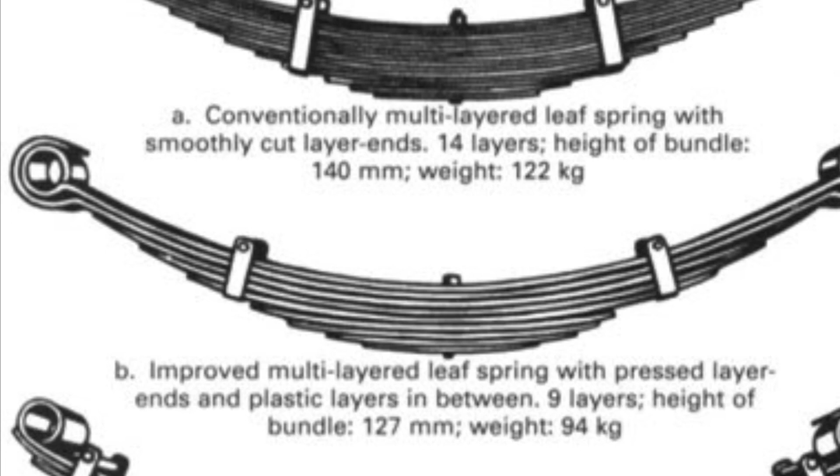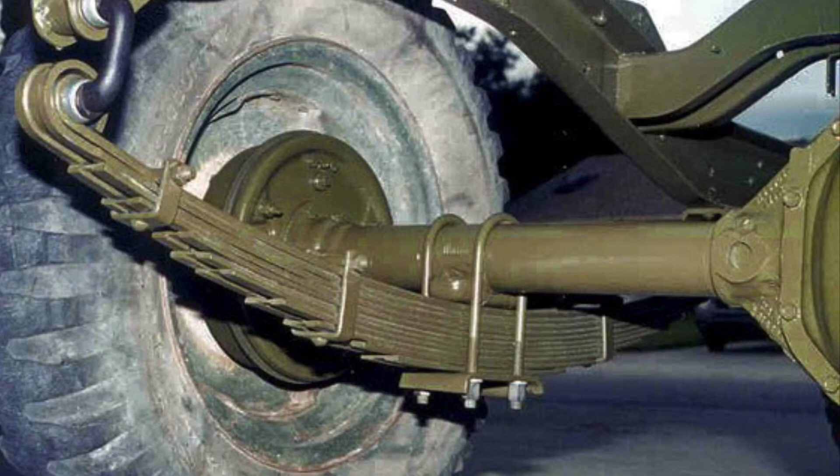The next form of individual suspension setup in the olden days was called a leaf spring. It looks like a bent, bowed bit of metal, quite thick wall metal, almost like a banana either this way or that way, made of a number of different bent bits of metal called leaves. The leaf spring has different sized bits of metal and allows for a little bit of compliancy and suspension.

But obviously that was very unsophisticated and very basic. Through the development of suspension, different manufacturers made different types, with different operating costs.

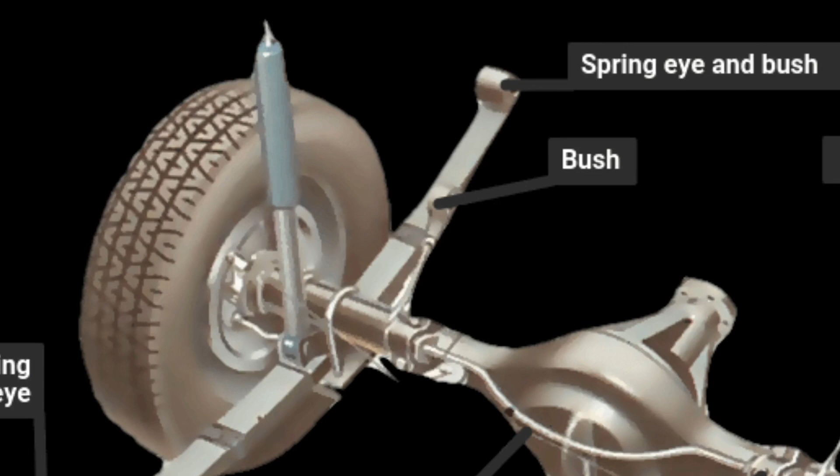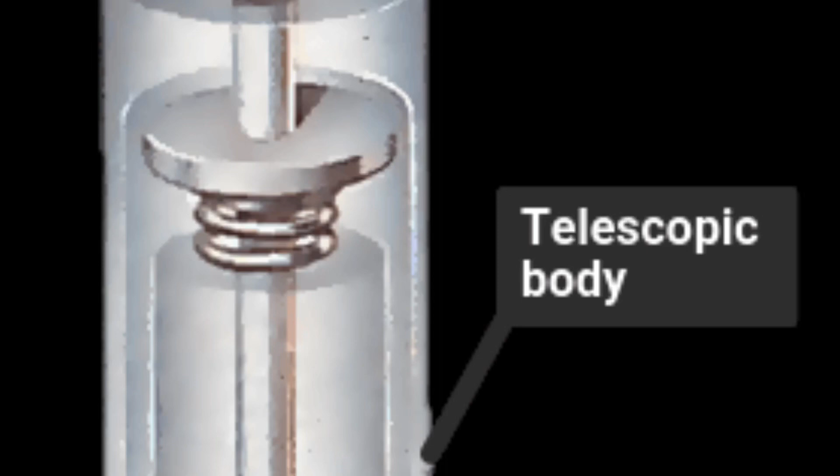The first kind of application was a dampener. The dampener allowed some travel and movement - it had a hydraulic reservoir inside with a piston, and as you pressed up and down, it would flex, move, and shock load depending on the frequency. There were porous holes inside the piston that allowed oil to go through and drain back through. But that was quite a basic suspension strut.

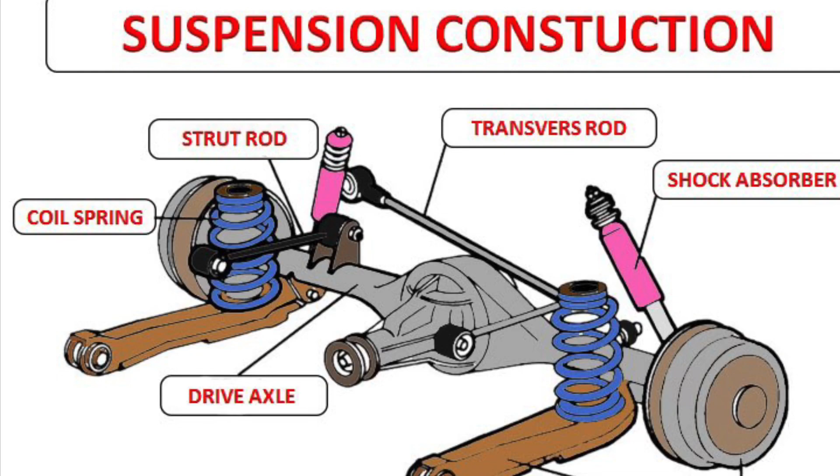Then there was a strut and a spring - they could both be used together. The spring allowed a bit more refinement, I guess is the word - a lot more flex, and that's basically what I've got over here.

Depending on how sporty a car would be, it would be dictated by how stiff a spring was used. If you've got a comfortable car, the spring rate and even the dampening rate is going to be quite soft, because a car needs to be comfortable. But on a sporty car, the suspension would typically want to be stiff.

There's a lot more science into that, because there's lots of other components that dictate how a car handles, like the anti-roll bar. In America they call it a sway bar, which is quite a good terminology - both terminologies for that piece of equipment are actually really true.

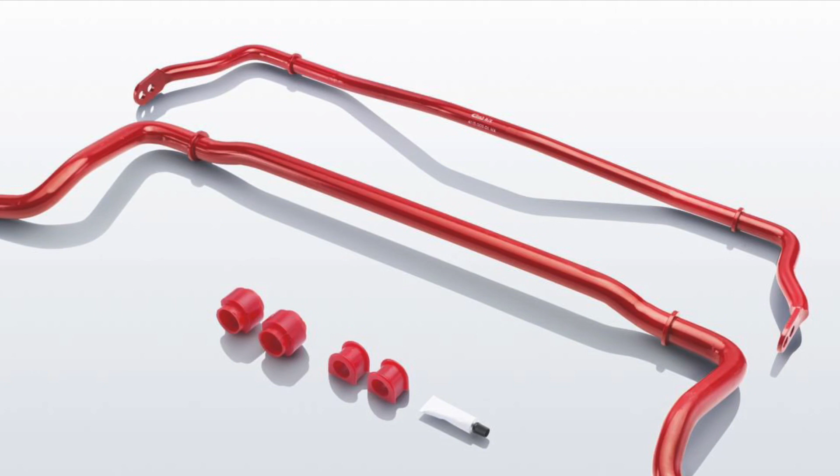Anti-roll - it's a bar that connects one part of the suspension on the left hand side to the right hand side, and vice versa. It's just one long bar that goes from one part of the suspension componentry to the other, and it acts as a brace bar from one point to the other, stiffening up the chassis to stop flex and sway from side to side. So it's an anti-roll bar or a sway bar as they call it in America, and I think Japan too, but we call it an anti-roll bar - they're both great terminologies.

Other than that, you've got wishbones added to some cars, and even double wishbones, independent suspension, independent rear suspension, MacPherson - so different forms of suspension that were a little bit more advanced than just a strut and a spring. Some suspension systems just use a spring, and some even use bump stops to avoid the spring or part of the chassis hitting and getting a shock load through the chassis. So you'd have a bump stop that would stop that happening.

And then, beyond that, I mentioned something called a MacPherson Strut. A MacPherson Strut essentially is a strut that runs through - I haven't got one, I'm gutted, I haven't got one at the moment.

Obviously we're in lockdown, so I have a strut in a barn somewhere else, but I'm going to use my arm to show it instead. A strut basically works together with the spring.

It's a coil over spring, which is the same as a MacPherson Strut. It was first patented by someone called MacPherson - I'm not going to go into any more of that. A MacPherson Strut is basically a strut with a coil over it, which is essentially a coilover. They were the first people to make and manufacture a coilover, so it was called a MacPherson Strut.

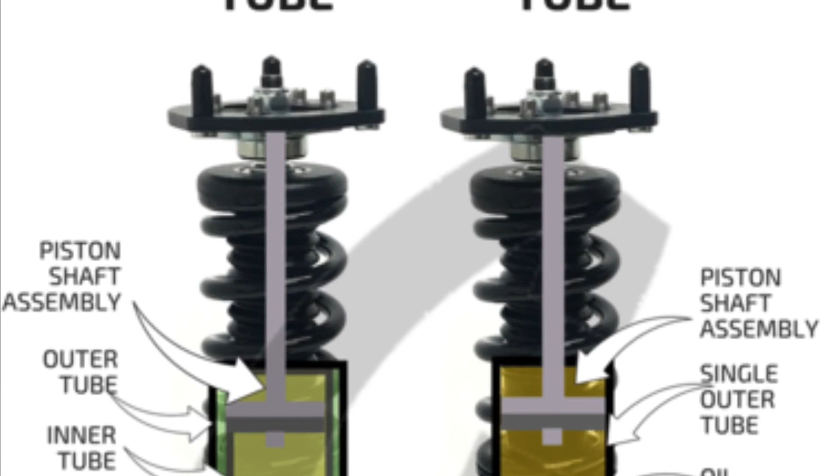Coilovers were the really sophisticated suspension system that kind of changed the world as such. But obviously you've got different things like your wishbone, drop links, ball joints, and steering knuckle - they're all attached to different components on the suspension, all parts of the suspension system.

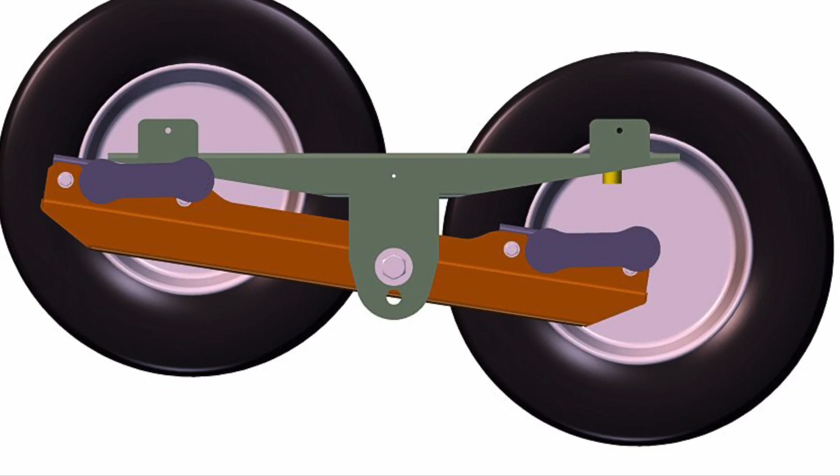On some older cars - and I can't think of any modern cars that still have it - there's old torsion beam suspension as well. They kind of have almost like a wishbone that rocks up and down as the wheel moves up and down, and the shock loading that normally happens on the strut and piston on the spring instead goes through a torsion beam. The vibrations and frequencies are transferred through it, which is almost like a single strut that runs from front to rear. It's a very unsophisticated bit of suspension, but works reasonably well and was used in cars quite frequently.

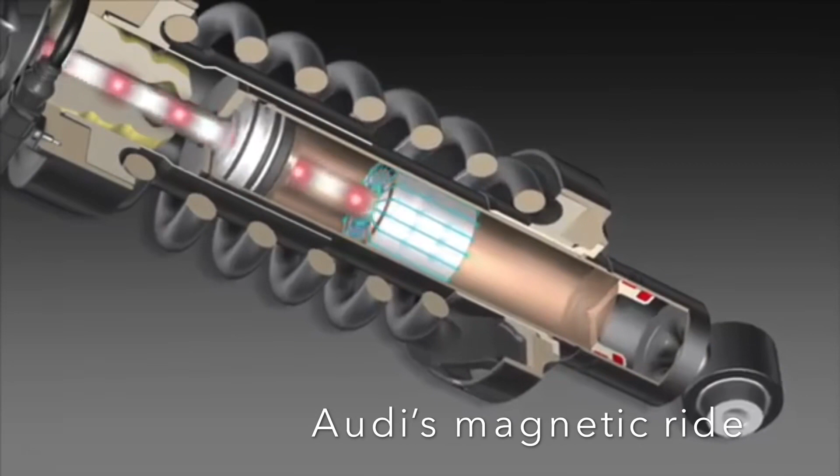Other than that, going back to a typical, decent coilover suspension, new advancements in suspension have also included active suspension - things like the magnetic ride you find in Audi and some Volkswagen Audi group cars.

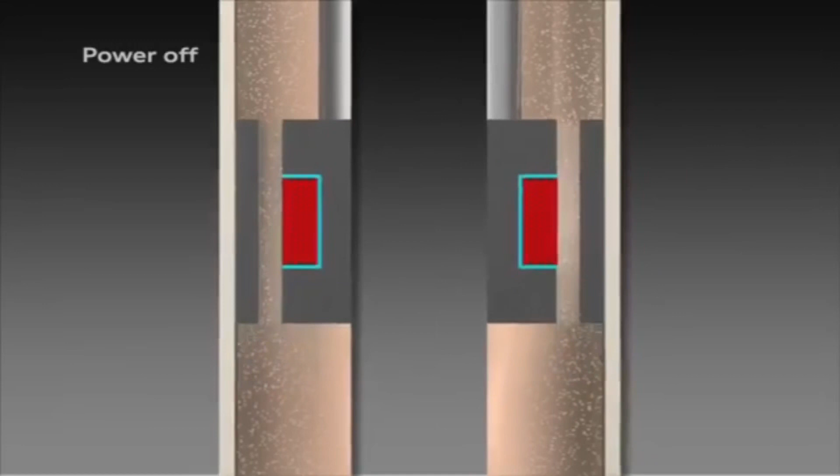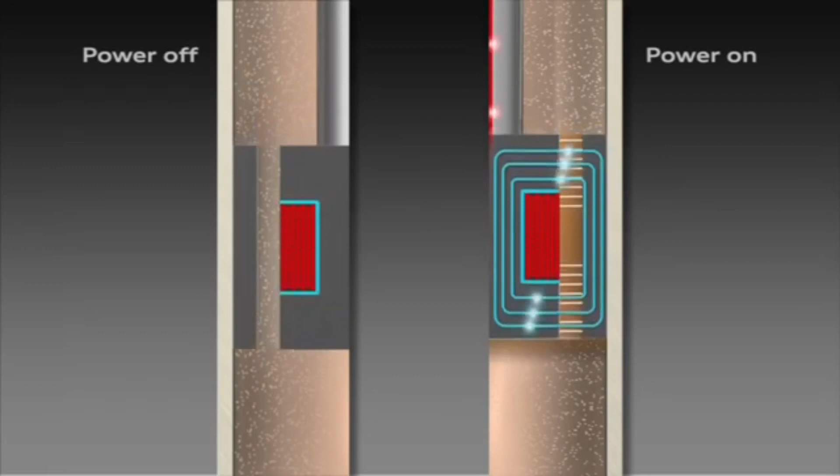It's still a coilover, but rather than just hydraulic fluid inside the strut, it has magnetically charged particles - iron ferrous particles inside the coil and inside the hydraulic fluid. A charge is put through the suspension, and that changes the properties within the oil, which then dictates or changes the dampening performance.

So you can change different settings on the fly, very similar to what you see in the new Honda Civic Type R or the Seat Leon Cupra - you have active adjustable suspension. Lots of other manufacturers use it now too, but it's quite an expensive component. What it allows a manufacturer to do is have a car that can be still very compliant - you can put it in comfort mode and it's really comfortable, or put it in sport mode and it's a completely different animal, riding like a super exotic bit of machinery.

So there's very sophisticated bits of suspension that have now been developed that are really, really interesting. Actually, if you look at the Koenigsegg as well, they've got this horizontal load spring, which is much like some of the race suspension you'll see. They call it inverted coilovers.

Actually, the '94 Supra had inverted coilovers. So rather than a coilover being put upright, they started to invert them, putting a bit of an angle on them, and it really used to increase the handling capabilities of the car by inverting them and using lots of different special componentry to allow it to do that.

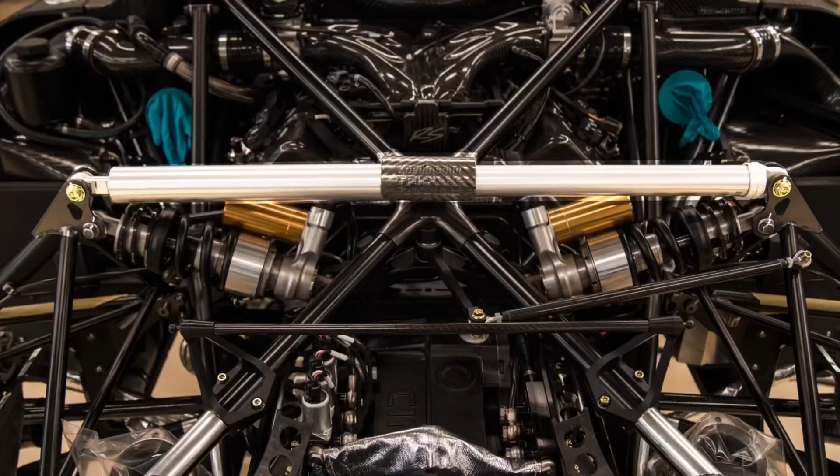And it's also active and biased, with yaw sensing to adjust how it loads. It's a special system with almost like a strut that goes across, and a set of connecting rods that then connect to the two coilover suspensions, a bit like some of the Formula One suspension. It's just incredible, with continual developments in the chassis, especially from the likes of Koenigsegg - just so impressive.

Essentially, a suspension system needs to take all the lumps and bumps of the road, and it needs to adjust the frequency. Sophisticated suspension systems will allow a car to do everything very, very well, whereas basic systems will only allow you to fine tune to one specific need.

When you're creating a track car, for example, unless you've got serious money, you're going to put a set of coilovers, albeit a very expensive set, with a specific dampening setting that's dictated or manufacturer controlled by the company that's valved that dampener. Although a special three-way coilover will allow adjustment in the rebound and the shock loading of that dampener.

It's really clever - you can use a little Allen key that adjusts the speed and frequency of the dampening, and you can fine tune a little bit as to how that car handles and feels. You can also adjust the height and ride height using a threaded ring and C-spanners just to set that suspension to a certain ride height.